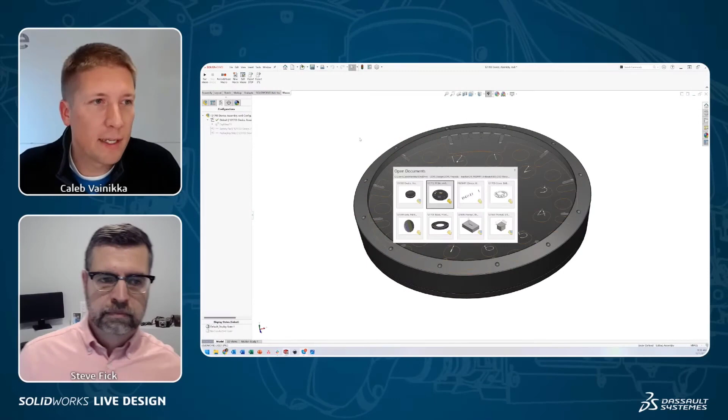Last year with Solidworks Live Design, we made some pretty special changes that will surely continue into 2023. That is bringing on community members to show off their favorite SolidWorks tips and tricks, as well as their creations.

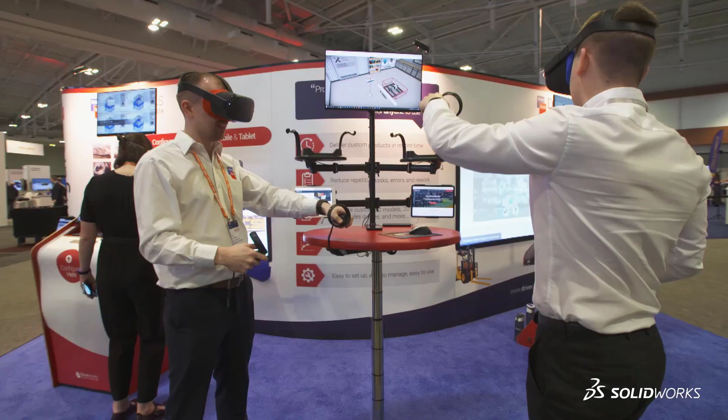If you're unable to attend though, we will have some technical sessions online as well. And one of those will be delivered by Adam here, who works at GoEngineer.

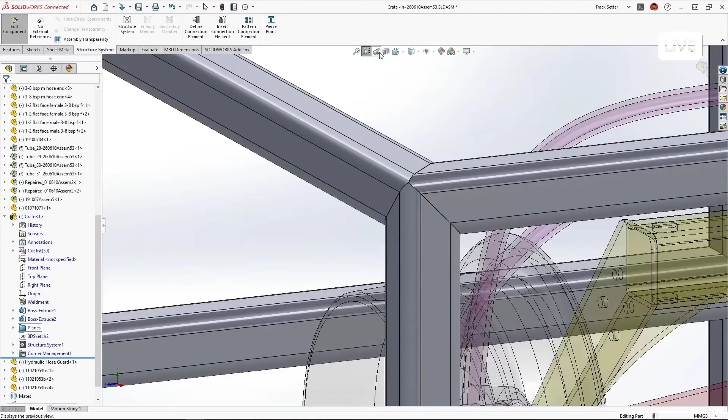And when I saw that your session was going to be presented and available, I was super excited. We just did the SolidWorks 2023 What's New episode on YouTube, which for a time at least was the highest streamed episode of SolidWorks Live. It's been unseated by the simulation episode we did late last year. Actually, just a couple of days ago, it was unseated.

But what made you want to create this session, which of course is about repairing mates in assemblies, and what are some of the key takeaways that you baked into it?

Talking about What's New 2023, a few months ago, that's what all the VARs were doing, myself included. I was presenting these are the things that are new in 2023. And when I saw this, I used to work in the luxury goods industry, and I worked on large assemblies, and mates were breaking as parts were updated and things changed.

Having experienced that, and I saw Auto Repair Mates and What's New for 2023, I got very excited. And of course, when I was approached by SolidWorks saying, 'Hey, we'd like everybody to submit what you'd like to do for 3D Experience World if you wanted to try to present,' I thought, well, this seems like a good idea. Let's go for it.

As it turns out, as I was going through and making the idea and trying to move forward with it, I was looking at other people's What's New videos popping up on YouTube, and I actually found that this was seldom talked about. So it just made me all the more convinced to really try to push this forward and talk about it, because this can be huge for some people.

You go through so many enhancements during the course of a What's New season, right? And we're all just trying to make sure our customers, the audience, see the value. We're tech people, we're excited to get this stuff out to the masses, but you don't get to focus so much on each individual enhancement, which is a shame. But you see the audience, whether virtually or in person, saying, yeah, Auto Repair Mates, nice vignette, nice little video, nice pick and click you did there. I can't wait to get back to the office, install 2023, and try it out for myself.

And we get to explore that further with your session, which we're going to show in just a moment. But hey Adam, before we go, is there anything else you wanted to shout out? Well, I made this presentation for all the engineers working on all those assemblies, so I guess it'd be a shout out to them. Hopefully you'll learn some tricks that in 2023 will make your life easier, and some other tricks that apply to all SolidWorks versions that'll hopefully make your assemblies break a little less.

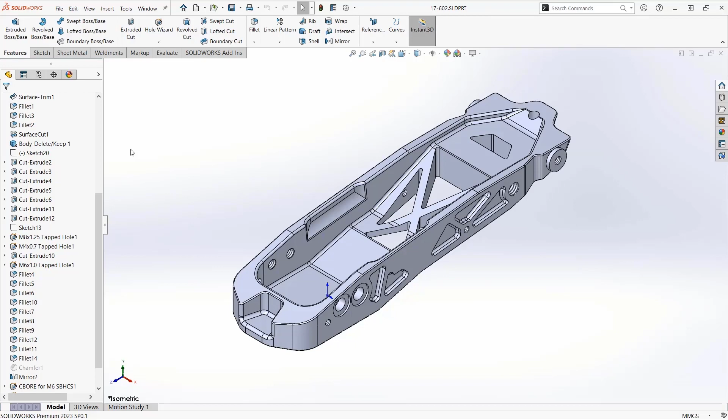Before we actually talk about using auto repair mates, let's discuss the current state of affairs with mates in Solidworks. I have this moto knee and foot prosthetic limb that I've been working on. Let's say we've communicated with an outside source regarding optimization to a component in the foot. We want it to handle some load, but also be as light as possible. They have returned with a step file of the edited part. They said very few changes were made, and the general geometry of the foot has remained the same. We want to verify fit and function within our assembly, so let's try and replace the part here.

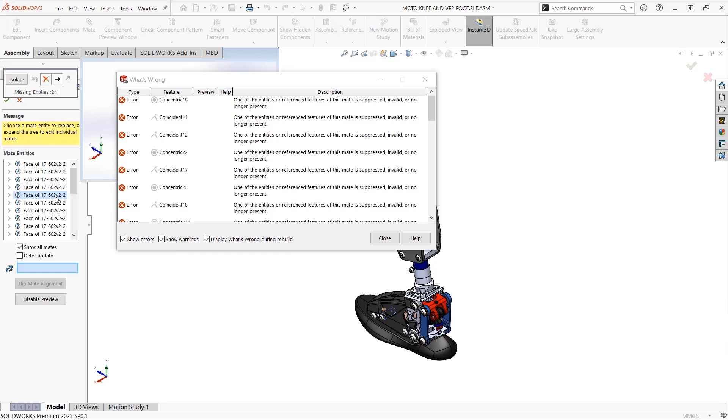Lo and behold, there are many mates that have failed to locate a reference. Our options here are either we fix the references in the replace component command, or we go into the mate manager later and replace the missing references one by one. There is some hope that we can eliminate some of that tedium though.

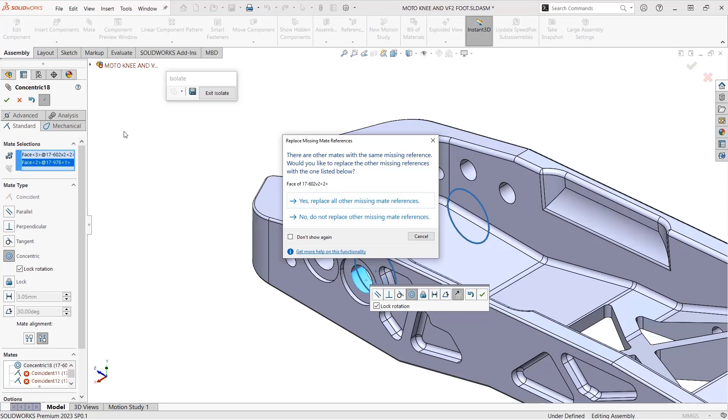There is a neat feature SOLIDWORKS has already got for us. When we replace the reference for this concentric mate, notice that SOLIDWORKS asks if we want to replace other missing mate references. That is because SOLIDWORKS is already smart enough to realize when a reference we have manually selected to replace a missing one should be replaced in the other mates that are missing that same mate reference. It just hasn't been smart enough to make those selections for us, but that is what has changed with auto repair mates. If I had to go into that assembly and replace each mate, it would take a few minutes, and that is with just one upgraded part.

What if you were in charge of that assembly and you were getting updated parts from 4 or 5 people several times a day? You can see how tedious this truly becomes. For some of you, this may be a big part of your job, as it was mine. But that's why you're here, to learn the new and improved, better way.

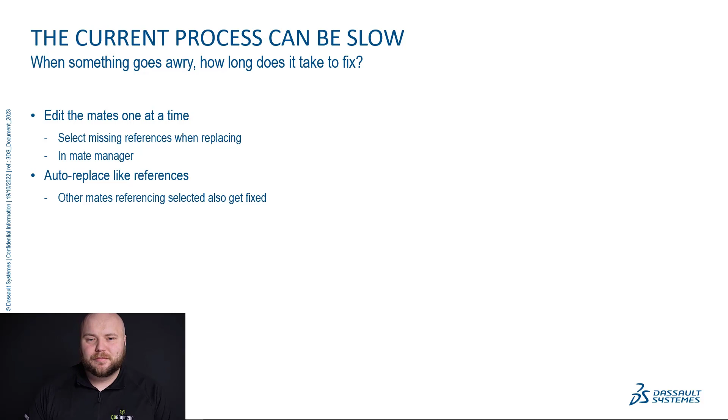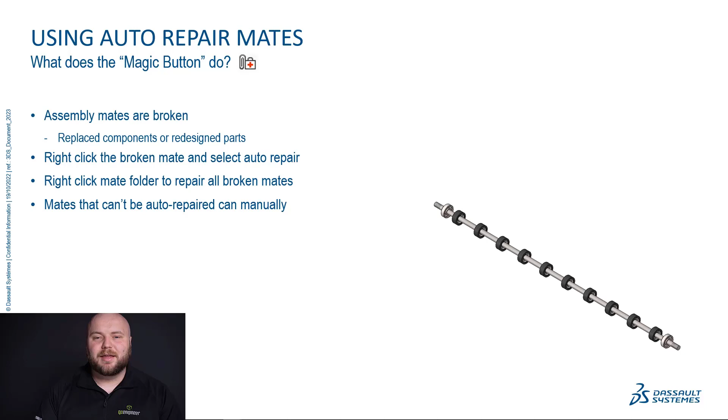When we make the replacement, the concentric mate for the rubber wheel gets broken, so we must go through the process for repairing the mate. Using auto repair mates is as simple as right-clicking the broken mate or the mate folder and selecting the magic button. Let's see that in action.

Like I said, we replace the inner roller bearing with the rubber wheel. I want you to take note that the rest of the inner bearings are placed via a linear pattern. This is a best practice that we will come back to later.

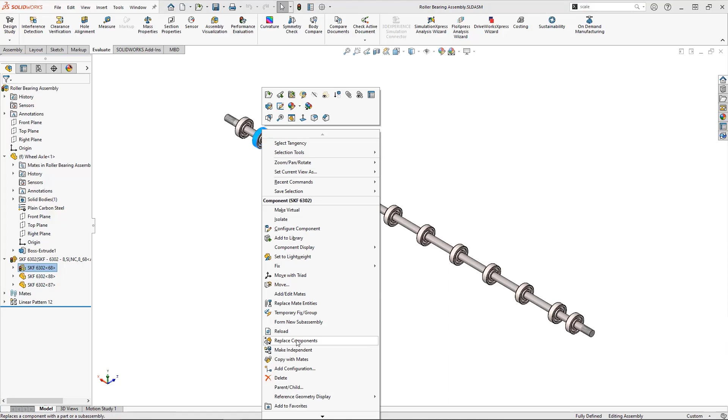Now when the replacement is made, we see that the concentric mate for the rubber wheel has failed and needs to be replaced. That's no problem. All we need to do is right-click on that mates folder to use auto repair mates. When we do, there is a magic button on the top of the drop-down. Clicking on this fixes our broken concentric mate and requires no further attention from the user.

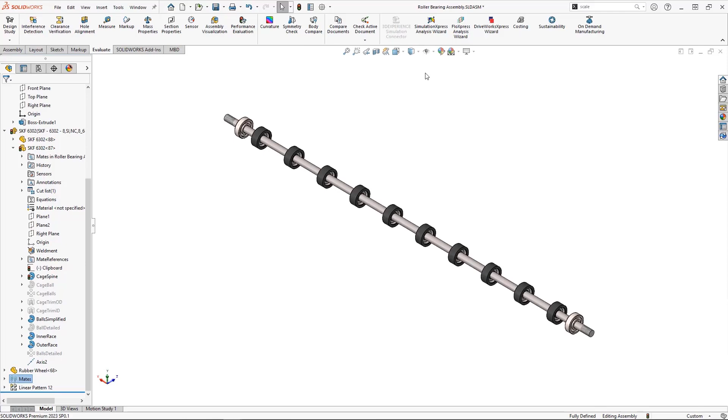And that's it. That's how simple it is to use auto repair mates to fix our problems. But now we need to know how SOLIDWORKS just did that. How does it know what reference to select?

Each time SOLIDWORKS rebuilds, it recalculates each of the mates that are used to hold the parts in place on an assembly. A face, an edge, or a point is mated together, and each of these entities has an ID. Now if you replace a part or even edit it, it is possible that the entity ID is no longer the same, so SOLIDWORKS loses it.

An auto repair mate replaces the missing entity with another by looking for entities that are in the same position and orientation as the missing entity. If there are multiple entities, it will choose one with the same or similar length or surface area, though most of the time it doesn't come to that. After a matching entity is found, it automatically updates the mate that has the missing entity with this new one. If it cannot do this process for whatever reason, some of which we'll discuss soon, it will ask you to manually select an entity to repair the broken mate.

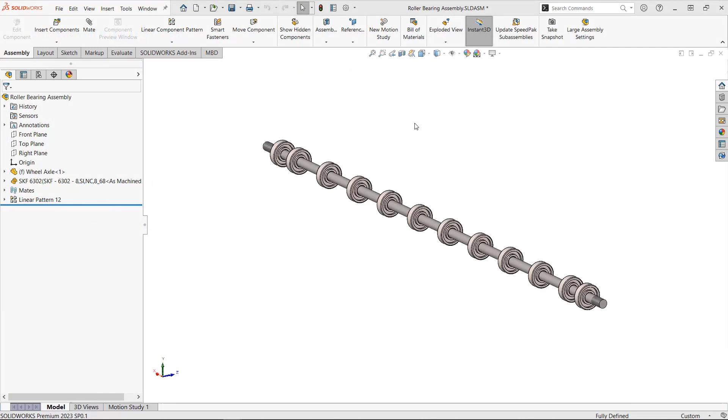Let's look closer at the roller bearing assembly. Since we know that the concentric mate for this inner bearing is the one that fails, we'll look at the faces corresponding to that mate.

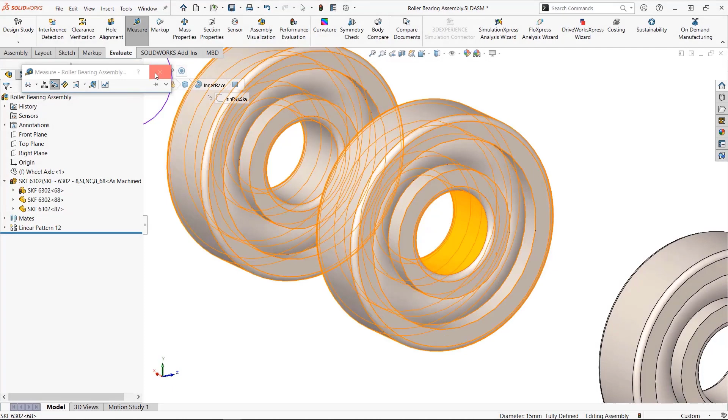As we can see, it is a cylindrical face with a diameter of 15 millimeters. Now let's replace that component with the rubber wheel to examine the face auto repair mates will select.

Looking at the face we want to replace the previous entity with, it is once again a cylindrical face with a diameter of 15 millimeters. That cylindrical face may have a different surface area, but it was pointing in the same direction and was the same size, so auto repair mates has found it.

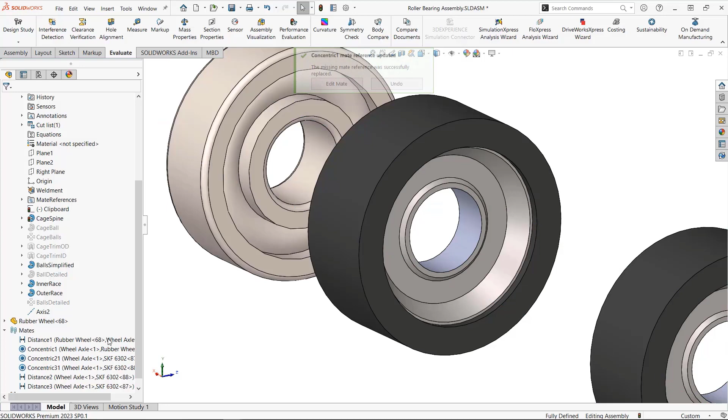When we select the repaired mate, we can verify that it did correctly choose the appropriate cylindrical face. It is awesome to see that Solidworks has been made just that much smarter to replace missing references in assemblies.

So we know how it works, but now we need to know some ways that we can make it not work. What breaks this new feature?

For one thing, because it's trying to find a new reference based on location and orientation of the previous reference, the new entity must match the previous one nearly exactly. What this means for you is that if you replace a part and move or rotate the part, auto repair mates will no longer work.

Nor will it work if the new reference is different enough that it is not in the same position or orientation. This actually isn't as bad as it sounds, because I would rather manually repair a mate than have auto repair mates automatically, and maybe accidentally, choose an incorrect selection.

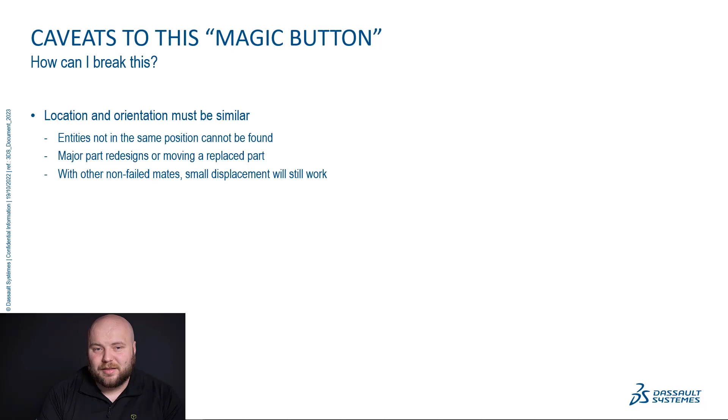Otherwise, I have gone through and tested each mate for its compatibility with auto repair mates, and nearly all mates will repair, with a few exceptions, and not a single reference was updated with an incorrect replacement.

A result of this feature's pickiness is I have found that any mate that is point-to-point has difficulty being auto-repaired. That is because in part replacement or redesigns, it is very common for points to simply not be in the same place they were previously.

Also of note, if you replace a component, auto repair mates will not find a missing reference that is an entire body, which is what's used in lock mates and some mechanical mates. Let's see how picky this feature can be in action.

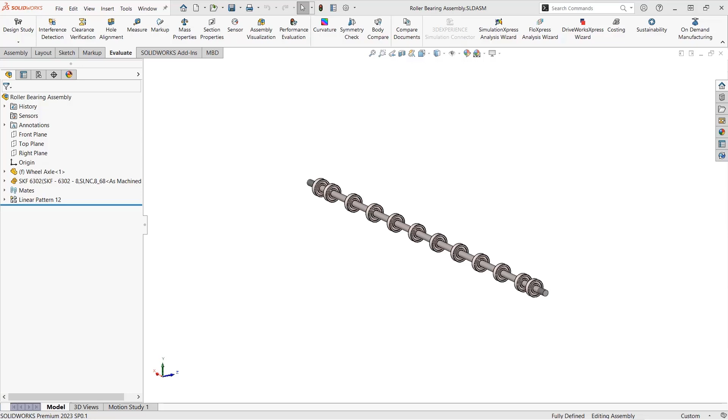We return once again to this roller bearing assembly. This time, I'm going to move the rubber wheel a little bit after I replace it, and then try to auto repair mates. Notice here, it did not automatically fix the problem. That is because the reference is not in the same position as it was previously.

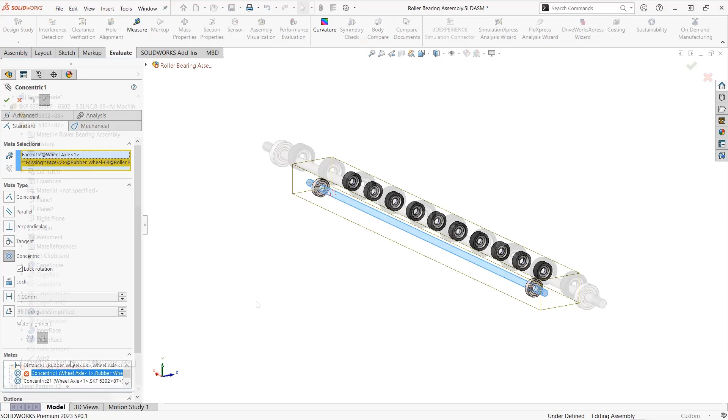This same problem would occur if we rotated the part before auto repairing mates. I've noticed for this model that the other mates that define the rubber wheel do it, and do it well, and it's just one mate failing.

So it may be possible that in this case, if the part was moved a very small amount and wasn't rotated, auto repair mates will still find the appropriate cylindrical face. And so it does.

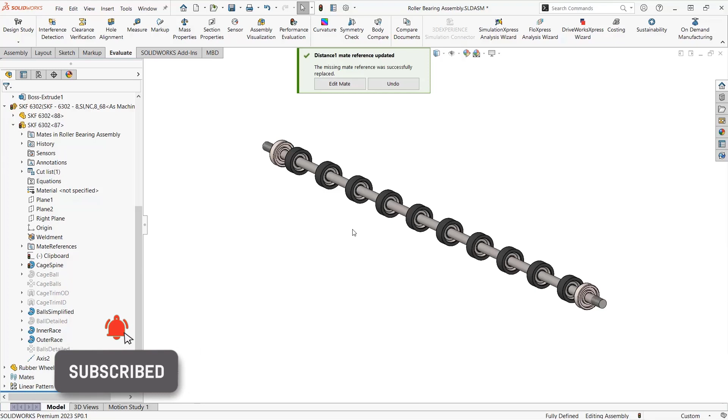Let's do a different example. In this case, before I replace the bearings, I changed the diameter of a hole for the rubber wheel by adding an additional millimeter.

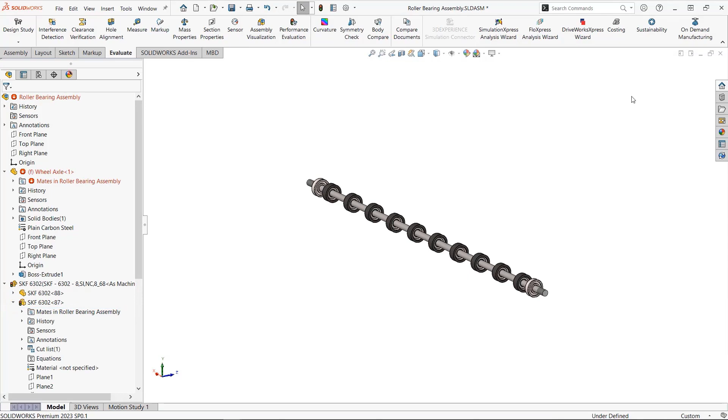Now, once again, we replace the inner bearings. As we attempt to auto-repair mates, we see that the mate can no longer be auto-repaired. This is because the reference no longer matches the previous one; it is 1 millimeter bigger in diameter.

Again, I do appreciate that it doesn't auto-repair mates on something that is not the same size, because it could lead to incorrect mates being created. But if you are trying to replace a part in your assembly because your machinist says they need the diameter a few thou larger, you will need to manually reattach your mates.

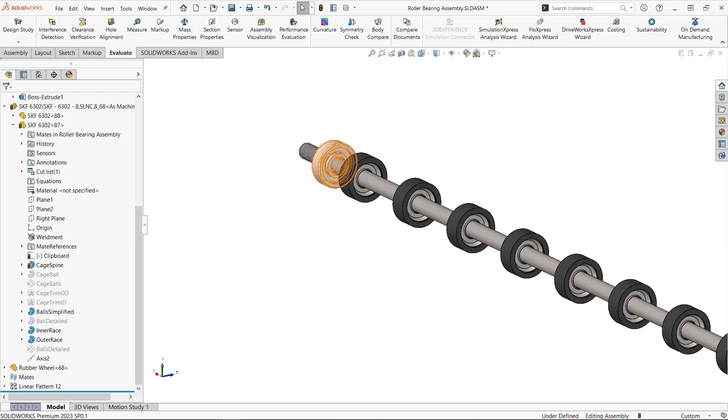And so, because we know how to break auto repair mates, we can take some steps to prevent that breakage, such as not moving our parts before auto repairing that mate.

Now we get to explore what the ideal use case would be for this feature, and this is where I'm going to pull in some larger assemblies.

We know that mates break when you replace parts or make design changes. When you replace one part with one of similar size, auto repair mates will often do a good job of fixing any broken mates, as we've seen.

Similarly, when you make minor part changes, auto repair mates can often find the missing references again. But this is especially useful when you have 100 rivets that are all replaced, or perhaps 20 support beams. Let's say each of those had 3 mates each, 2 of which broke. That's a lot of mates we used to fix manually.

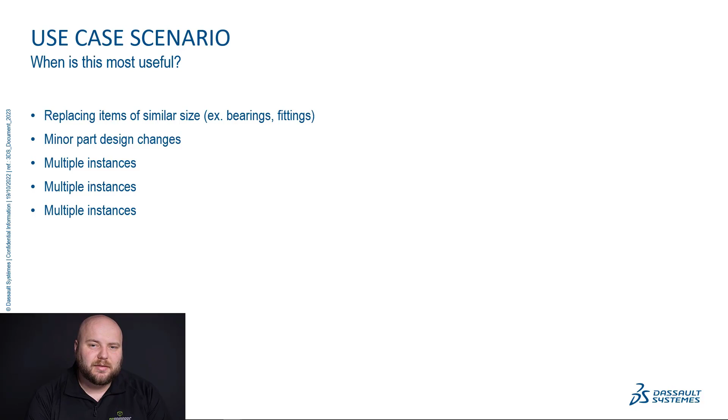What does it look like when we use auto repair on an assembly that has that many broken mates? Now, I've got another larger model that's going to show you an example of this. This is the DTV Shredder full assembly model, which, as DTV put it, is an innovative combination of tank, skateboard, and stand-up jet ski.

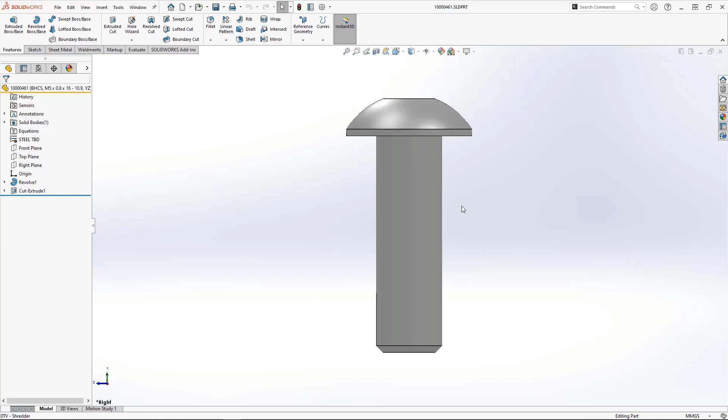As we're working on this new project, we might get news that our previous supplier of bolts has, for one reason or another, become unable to fulfill our demand. So we have these new bolts from a different supplier. This supplier has given us a Solidworks model to use, and it looks like the head has some slightly different geometry, but the shaft otherwise remains an M5 standard. This doesn't yet have a part number in our system, so for now we'll call it prototype 461 bolt, as those are the last three numbers in the part number it will replace.

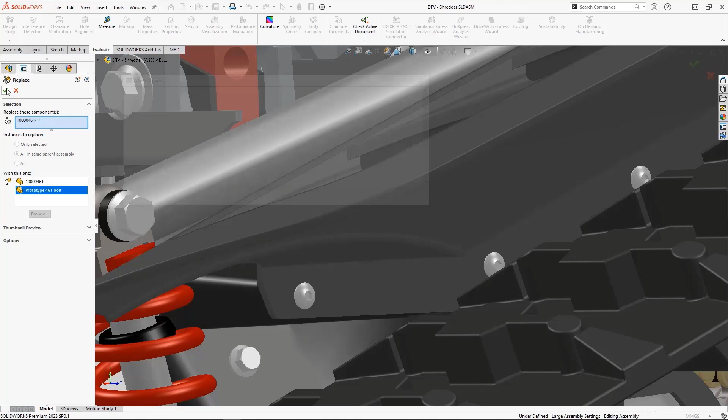When we replace the component for all instances in this assembly, we get the dreaded message that 18 mates have failed. Using auto repair mates is just as easy when one mate fails or 100. When we use that command here, we see that all 18 mates have been repaired.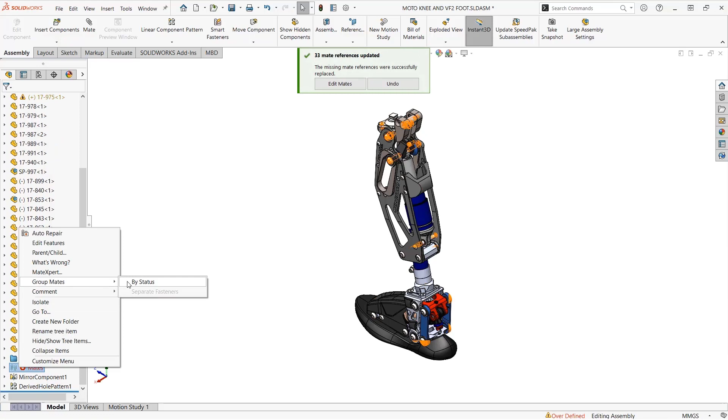But remember that Moto knee we were working on earlier in the presentation? What happens to that example when we use auto repair mates? Notice again, when we update the old part with the new, so many of our mates have broken. All I need to do is let auto repair mates work its magic. Because the part with updated geometry has such similar geometry, it is able to replace every single missing mate reference. The only thing we needed to do is suppress a couple of mates that are now making our assembly overdefined, which we would have needed to do anyway.

Because of this command, we now have enough time to finish those reports our supervisor wanted yesterday. That is the potential of auto repair mates. The amount of time saved is huge, more time to be put to more effectual use on your projects.

Though, as I mentioned earlier, the best way to fix all your mates is to never break them in the first place. There are a few techniques within SolidWorks that help us do that. The three ways I would recommend to help prevent the need to repair a lot of mates would begin with: first, use replace entities in your parts instead of outright deleting sketch entities.

These sketch entities become the entities that we select for mates, so if they get deleted instead of replaced, our mates may lose the references and become broken.

Second, we should utilize more subassemblies in our assemblies so that if something breaks, we just have to fix it in one subassembly to fix it for all the times in our main assembly. This has the added benefit of generally improving performance in our assemblies.

Third, make more use of patterning parts or mirroring in your assemblies. Once again, the goal would be to fix something once and not have to worry about fixing it for all of the other instances when the failed mate would have occurred. This third suggestion was the best practice in use on the roller bearing assembly that made it so that only one mate broke when we replaced the rubber wheels, instead of one mate per rubber wheel.

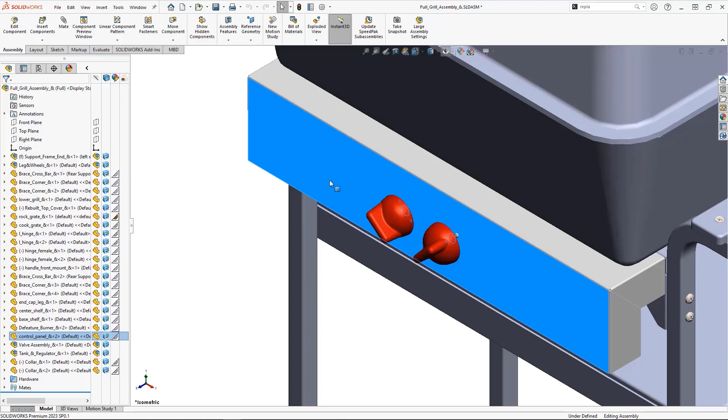But let's take a look at this grill assembly to see another example of why these best practices matter. This front control panel piece has a couple sets of holes for valve control knobs. Now we want to make a design change and shift those holes half an inch lower on the panel. When we open up the part and start editing the sketch that makes those holes, we could simply change these dimensions by half an inch and nothing will break.

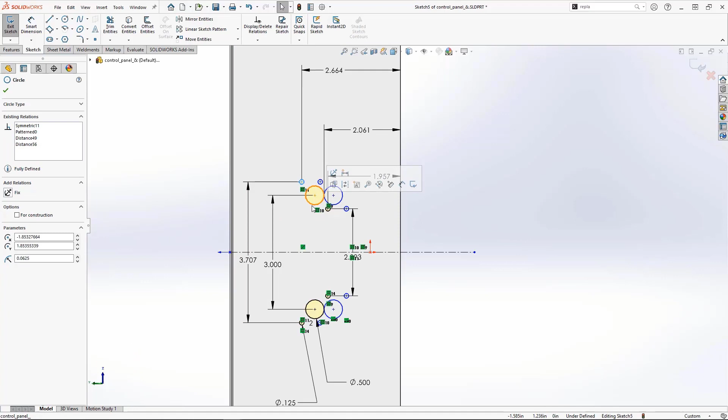However, it may be faster to simply do a linear pattern on the holes, use fully defined sketch, and delete the previous holes, so that's what we'll do here. We tell SolidWorks to add new holes half an inch down. Now we delete the previous holes. To finish up, we'll fully define the sketch from similar edges as it was defined from before.

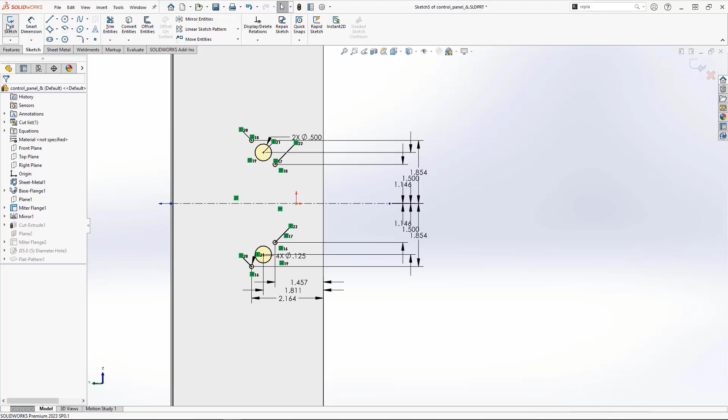Now let's go back to the main assembly and rebuild. Notice that we have several broken mates, and because the holes aren't in the same location, auto repair mates may not even work. We could have done something better.

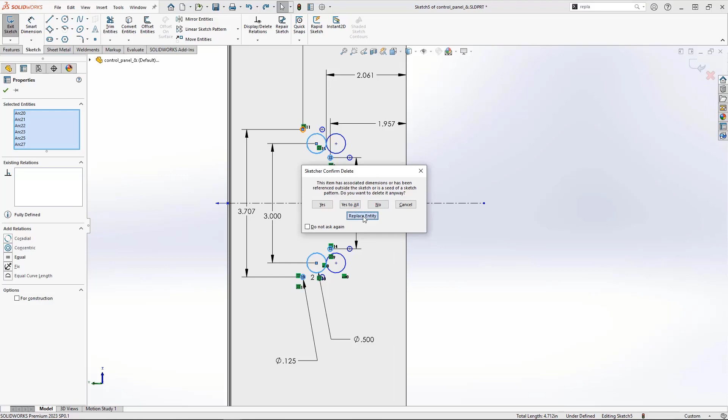Back when we were deleting the previous holes, instead of deleting them, we could use the replace entity command. We can get to the Replace Entity command through the menu, or by selecting Replace Entity in the Confirm Delete dialog, as I did here. This updates all previous references to that sketch entity and the things it would create to some new sketch entity.

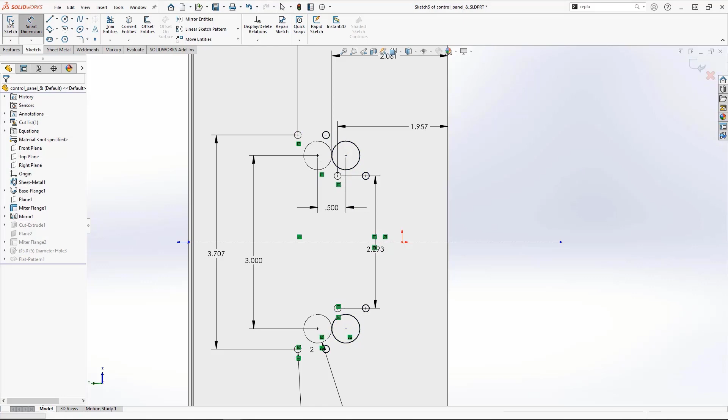This works perfectly for our case. We can choose to either delete the old sketch entity at this point or simply turn it into construction geometry. Now that we have done Replace Entity to all of these holes, we return to the main assembly again. Notice now, because of this procedure, no mates needed to be repaired.

Next best practice is to use more subassemblies. Ideally, you would try to minimize the amount of new parts inside of an assembly and use a subassembly instead. That's mostly because of mates. We've discussed how each time an assembly rebuilds, and it does often, it will recalculate each mate.

If there are a lot of parts and mates in an assembly, that's a lot of rebuilding time. With exception to a flexible assembly, a subassembly will have all of their mates contained within that subassembly and comes into the main assembly as a fixed collection of geometry, so they don't need to be calculated. So this is a good recommendation for performance, but where it helps us where we're concerned with repairing mates is if we have a set of stuff that is repeated for an assembly. If one of those components breaks its mates, you just have to repair it in that one subassembly and it will solve all of the problems in the main assembly.

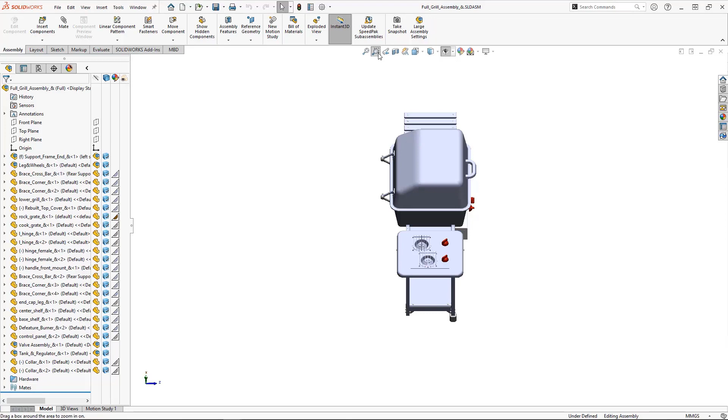A good example of this is the hinge in our grill assembly. There are 2 hinges in this grill assembly, so this would be a perfect opportunity to make it into a subassembly. I'm going to drag a box around the hinge and all the toolbox components, and I can choose to Form New Subassembly in the menu that appears when I right-click on one of the selected components in the design tree. This takes all of these components and any mates that refer only to any of the selected components and sends them to the new subassembly.

Otherwise, any mate that refers to a component of the subassembly and something outside of the selection set will remain in this main assembly so the hinge stays in place. Let's rename this subassembly hinge, the same way we would rename a feature on a part.

Now that our subassembly is complete, we need to go about replacing the other hinge with this new subassembly. Once we've done that, we need to show that this grill lid can open. To make that possible, we need to make our subassemblies flexible. We can do that by selecting this command from the pop-up when you select the subassembly in the design tree. Now we need to test to make sure this lid moves.

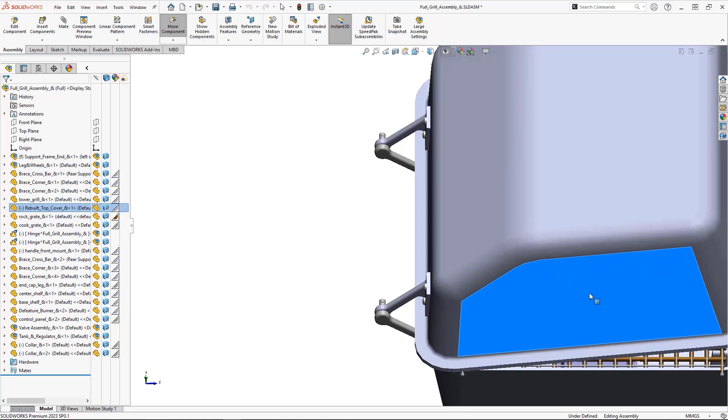This new subassembly has been automatically saved internal to this assembly, but we want to save it externally with its own file name. I'm going to right-click on the subassembly and save just the subassembly externally in the same folder that the main assembly is located in.

We have now been told that we need to change one of the holes for the screws to be a 1/4 inch slot. Let's go ahead and make that change, and for the sake of the example, let's neglect using replace entities and simply make the original circle construction geometry.

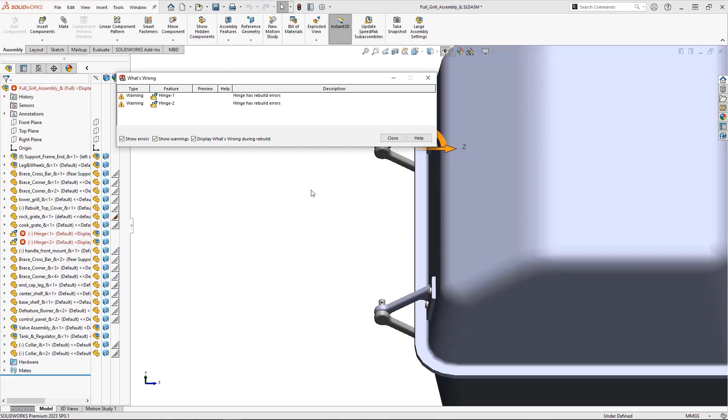Now when we return to the main assembly, we see that both of the subassemblies have failed mates. Because this is a slot instead of a hole, we will now go into the mates folder and delete the old mate. We will instead replace it with a mechanical slot mate to take advantage of the fact that we are using a slot for our fastener.

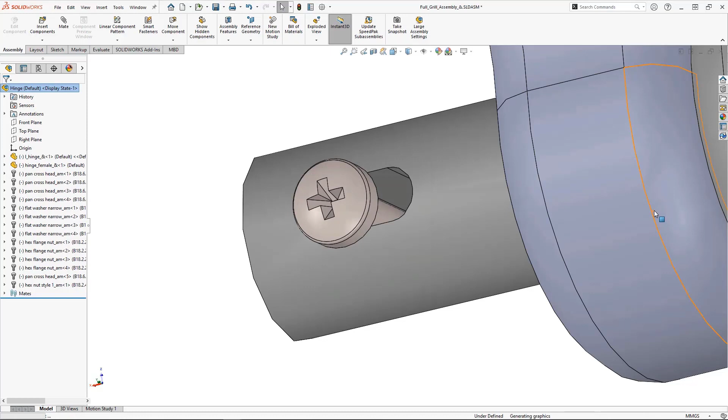And because we have made this a subassembly, we only had to make that change once, and it has been applied to both hinges. This one might seem somewhat common sense, but I have found that subassemblies are not often utilized to their full potential.

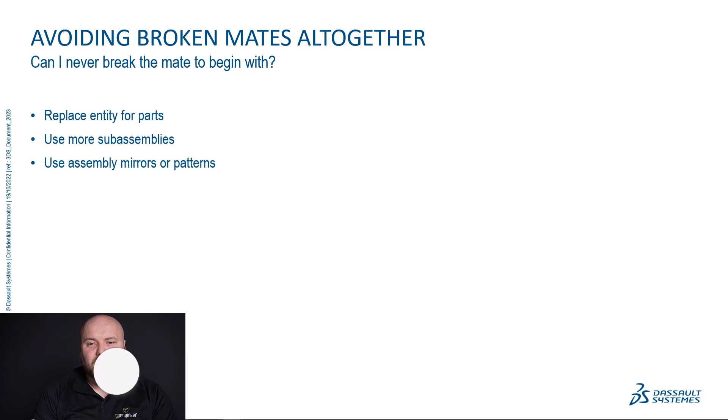Lastly, let's briefly discuss using assembly mirrors and patterns. As far as mates are concerned, the use case for this is much like using subassemblies. When a mate breaks on a part that has been patterned or mirrored, you just need to fix the mates on that one seed part, and all pattern parts will not need changing unless the mirror or pattern condition become invalid. To show off patterns, the part of the grill that makes a lot of sense to look at is the support frame at the end.

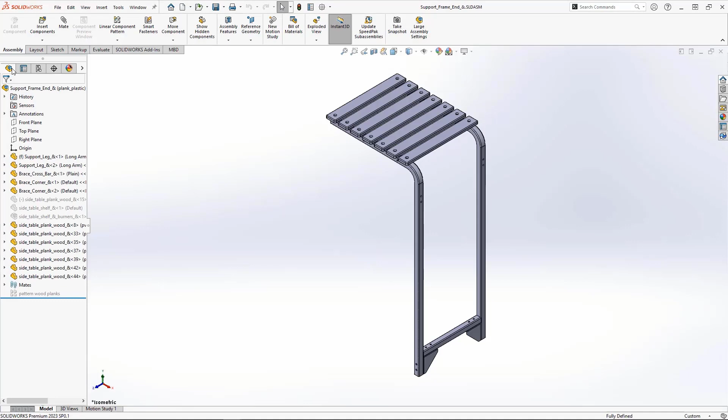Here we have many plastic slats that are placed along the frame. In this example, we need to remove the countersink from the plastic plank holes. When we do that and return to the subassembly, we see that each of the plastic planks had mates that failed. If this subassembly was constructed better, we wouldn't need to repair all of these mates, just one.

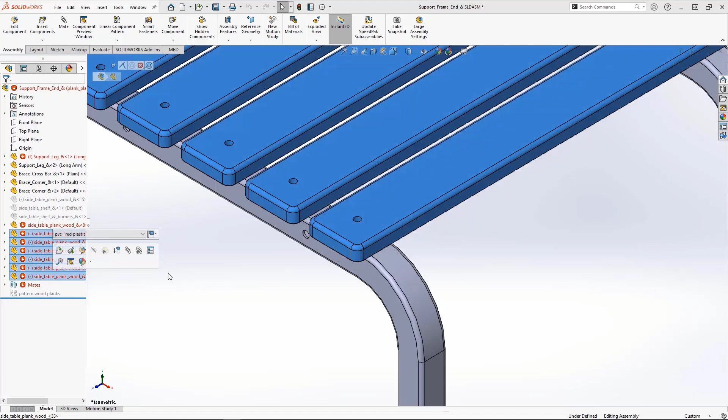To improve this assembly, I'm going to delete all but one of the plastic planks and use a pattern to create the other planks instead. I'll use a pattern-driven pattern because the holes the planks line up with were created with a pattern that we wish to match.

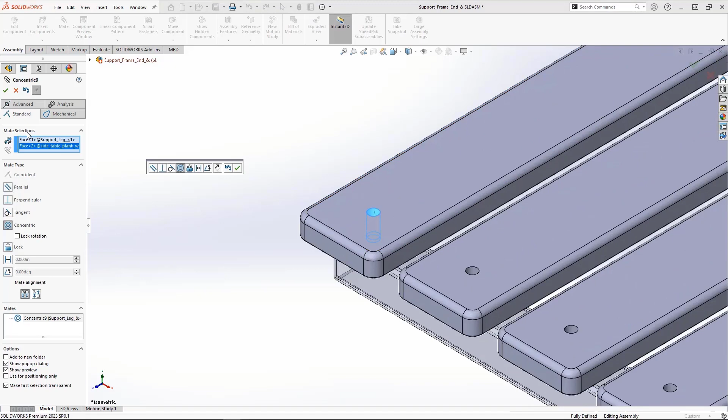Now I just have to fix this one mate, and the rest of the planks are fixed as well. Following all of these best practices combined with the new auto repair mates tool will make spending hours fixing mates in an assembly far less common, if not a thing of the past.